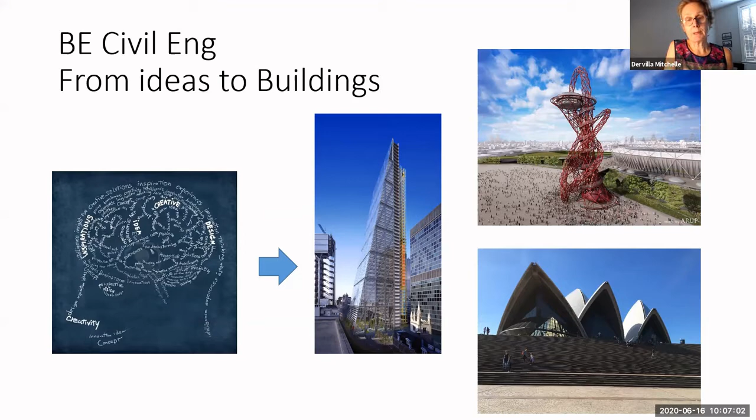Of these three pictures, one is Leadenhall Street in London, I was involved with. One might find oneself involved with buildings or bridges, or in this case, on the right-hand side, a sculpture at the London 2012 Olympics. So turning ideas into buildings is my job.

If I look at my career on a single sheet, I've gone from being a structural engineer to being a multidiscipline engineer. I started with a lot of design and calculations. I found myself managing teams of people, then leading projects, and eventually what I would call design team leader - the DTL - leading large multidiscipline design teams.

I've been responsible for groups of people, and I've had a lot of work in aviation. As Amanda said, I started in Dublin, had a couple of years in Boston which I thoroughly enjoyed, and then returned to London. I've spent quite a lot of time in London ever since - I think it's about 30 years now in London.

But my early work was very simple extensions. Although I started in UCD, my first work was in Trinity - extensions to the Pavilion Building, extensions to the Science Building. Very simple things, but things as a young graduate I could get my hands around.

I was extremely proud when I was given my first package, which was the handrails and crush barriers at the East Stand at Lansdowne Road, now long since demolished. But as a young engineer, I was proud to have that responsibility for people's safety at a new stadium.

And then I spent a year on site at the UCD Library Extension, so those of you who are from UCD will recognize this building. It was a very different time then - here's a picture of young Dervilla on site with no ear protectors, no health and safety equipment. I think the industry has moved along quite a long way, and health and safety is now at the forefront of our minds all day and every day.

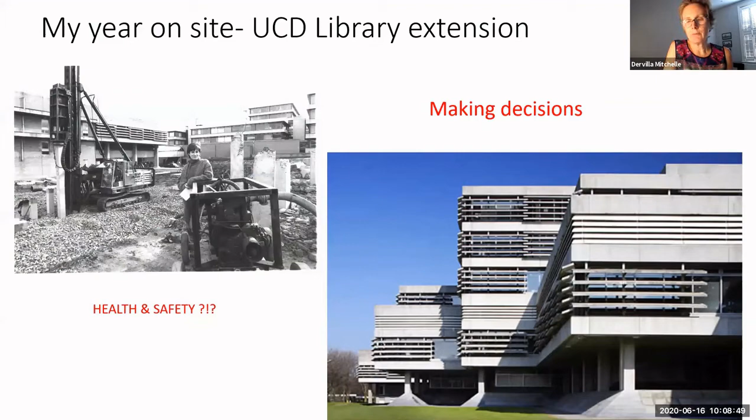But then I was married, and I had the opportunity to join my husband in Boston, where he was studying at Harvard for an MBA. And I joined a company called Weidlinger, and I had the chance to do lots and lots of projects.

I left Ireland at a time of recession, and so I would advocate to you to think about the opportunities that a crisis or a problem brings, particularly now as we're locked down with COVID.

So what did I learn from working with America? I learned to be much more independent. I'd moved from a large organization, Arup, where I was very well supported, to a much smaller organization where you had to be independent. I learned how to move from metric back to feet and inches - so how do you relearn some things?

And I also did the same hotel in 2 different cities, and what you discover is how much more you can become more efficient and you can improve what you do. So America was a hugely learning experience.

But we returned to the UK, and I call this the shopping centre boom - in the late 80s, 90s, all there were were shopping centres and town centres. So what did I take there? I learned to be responsible for a larger team, and that's a bit scary at first, because you're responsible for everybody else, and also you're not as efficient because you're suddenly looking after others. But I think you have to just take the opportunities as they arise, and I learned a lot about retail.

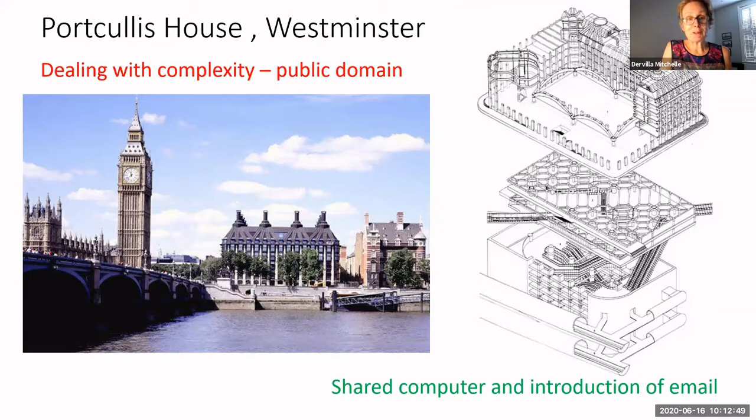Technology was changing. And then this is probably one of the most significant steps in my career, was moving and spending six years based at Heathrow, taking the Terminal 5 project from early concept stages right the way through to delivery and completion of the structure.

I did not stay on for the fit-out stage, but it was six years of fantastic learning. You have to acknowledge that sometimes during your career you have to stick with a project for a period if you're going to really extract all the learning from it.

At that stage it was the first time I really came across what we called at that time a single model environment, one single model of every single bit of the building - structure, services, baggage, everything. An image from it is there on the right. Today that's called a common data environment, but it's taken a long time for it to be more adopted by the industry.

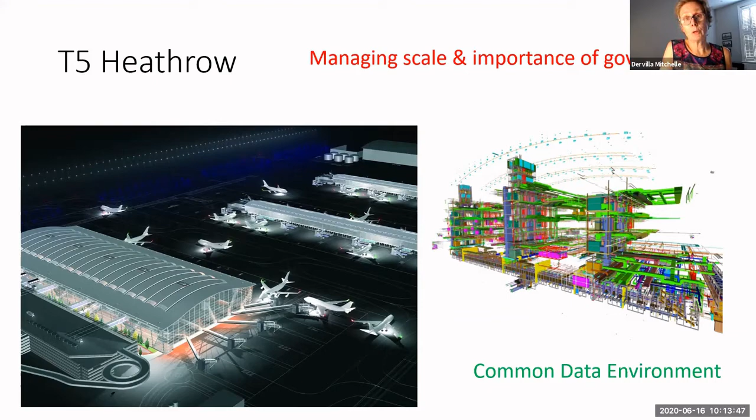When I finished at Terminal 5, you have to go win more work - that's the stage of your career where you've got to win more work. So I was part of the team that won Terminal 2 in Dublin, and I spent the next couple of years traveling from London to Dublin every week to work on this project. It's nice to have a project in my hometown.

After that, another major project - I worked on the housing for the Olympics 2012, but in effect it was the creation of a new city and housing in the east of London. That was very demanding in terms of time and delivering something cost effective, so very different from the airport work, very commercially driven.

Then I decided to accept another challenge - I'd done two airports, and here was one in the Middle East. It is absolutely vast; those facades at the front of the building are something like 70 meters tall. If you look at the slide on the right, I can highlight some tiny little red dots - those are people, showing the scale of the whole structure. So very large, very complex project, a different cultural environment, different norms, a different way of working.

I've probably worked on that for over six years. It's not yet finished, but it's been a massive learning experience and exciting to understand a different part of the world.

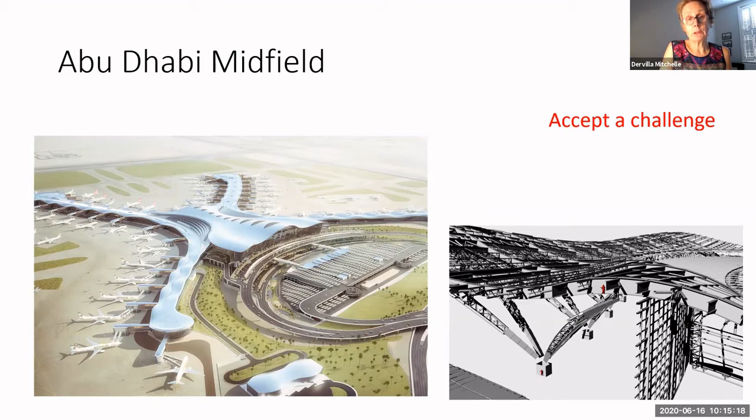After that, I returned to my home base in West London and worked on the expansion for Heathrow. It's now stopped, but it was very interesting to work collaboratively with a range of competing engineering and consulting organizations to conceive and be ready to deliver a new master plan for a major airport. Very different work - front end planning, organization, enabling - as opposed to delivering design. I enjoyed focusing on a different part of a stage of a project.

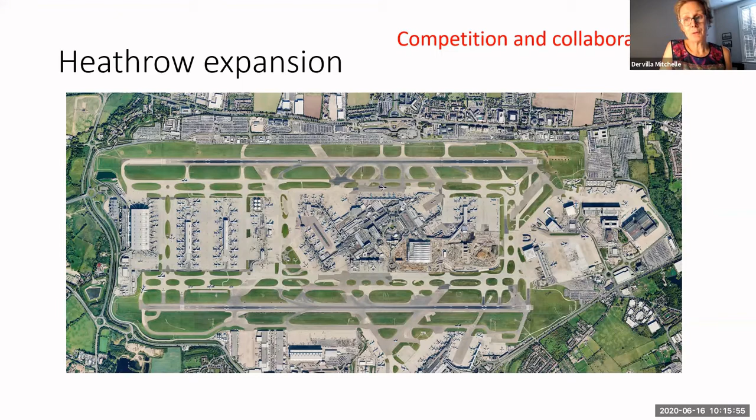I wanted to say that over my career - which thinking about it today makes me realize how long it is - I've moved from a very drawing board, paper-based set of tools, right the way through computers and programmable calculators, to now storing most of our data in the cloud and working collaboratively in the cloud. That's been a big, big change. I think that's one of the exciting things, that it's always evolving and changing. But probably more important for me is that the output has become much more exciting and interesting.

When I started out, top left, it was everything to do with reinforcement drawings - paper, black and white. We moved at the T5 stage into 3D models, lower left. Now on the top right, you see an animation of the design of a stadium, incorporating the landscaping, the structure, the services, and the flow across the top is the model of the air temperature as it flows across the stadium, and how they maintain a cooler temperature within the stadium for the players. On the bottom right is one of the most major projects in London, Crossrail, where we can model the existing services, the new station, and the people moving through those facilities. So it can be viewed by clients and people not engaged in the business much more easily, and we can explain our work much more easily.

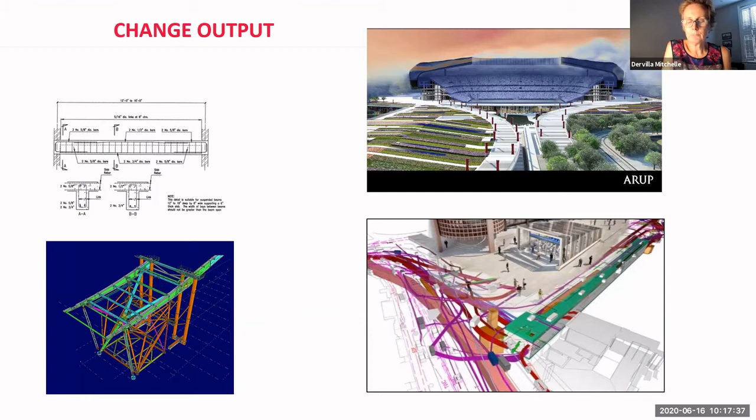But we're going to move forward into a time where we're going to experience our work. I'm just pressing play here.

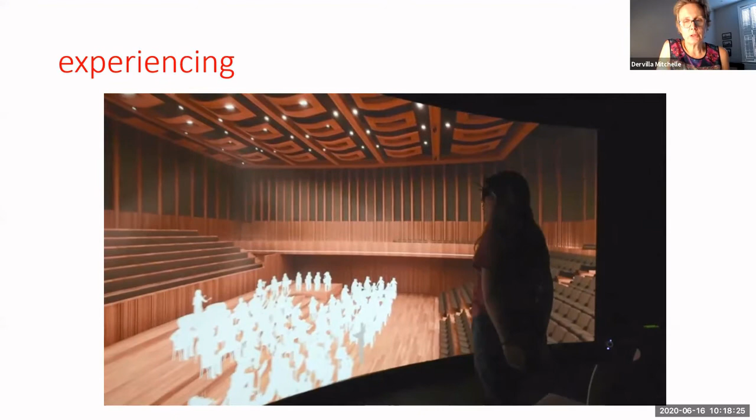This is a little lab, what we call SoundLab, in one of our London offices. Here, before the design has been completed, while we're talking to the client about a new concert hall, we can bring the client into the office, and they can both hear the orchestra that's playing and see what it would be like to be anywhere in that auditorium. So they can sense and feel what it's going to be like, and they can tweak the design in advance because they're able to experience it. I think this is not done on every project at the moment, but it will be done on most projects in the future. I think that's great.

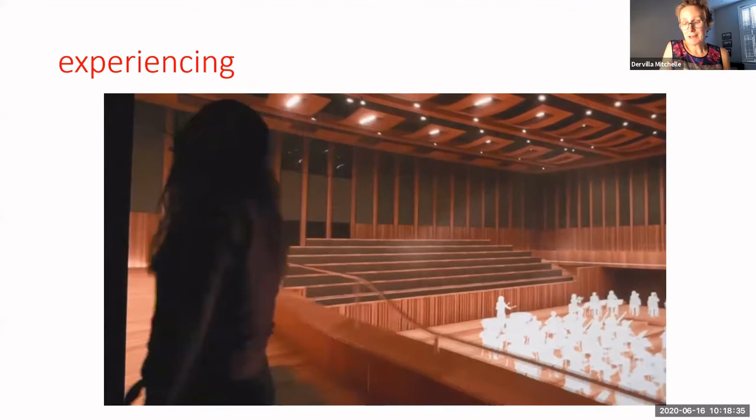I'm going to stop speaking for a minute and have you listen to one of my colleagues, because this is a view of what might happen in the future - how we use robotics and how we create material in a different way.

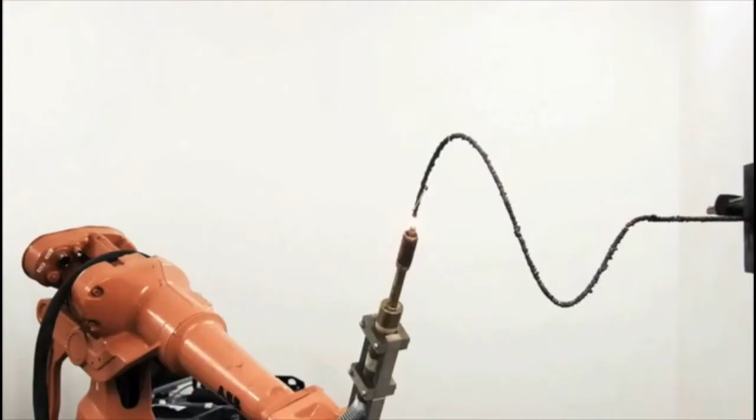So this is a bridge in Amsterdam. This project, the MX3D printed bridge - it started with an artist who specialized in designing chairs using digital fabrication techniques. One day he put a welding device on a robot arm and started printing steel wires in midair, then decided, hey, that could be a bench. When the bench was done and it looked beautiful, and he figured out his technique, he said, well, this could be something else as well. Then he decided, let's make a pilot project out of it, and let's print a bridge. Now, if you make a chair, you get a big guy to sit on it, kick it a couple of times, and if the chair doesn't fail, it works. With a bridge, it's a bit different - you need some engineering, and that's when they called us.

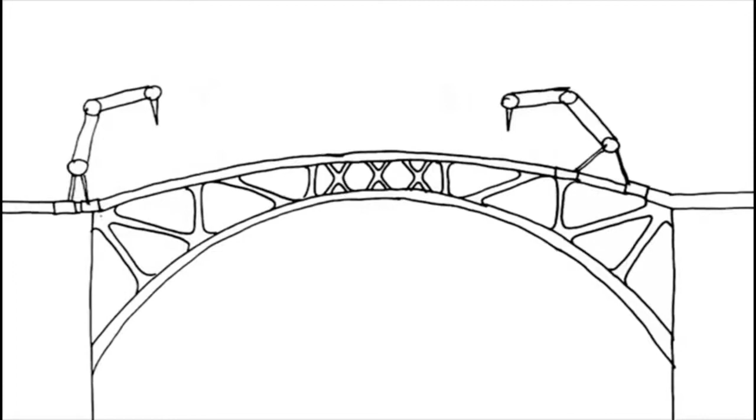We came in with our traditional engineering constraints. It has to be safe. It's going to be put in the red light district of Amsterdam, so women in heels are going to be walking on it, so it has to be dense, and all other kinds of constraints that we brought along. Slowly we came together on this project. It's a new construction technique, and it's also a very difficult product because we don't know the tolerances, we don't know the material specifications.

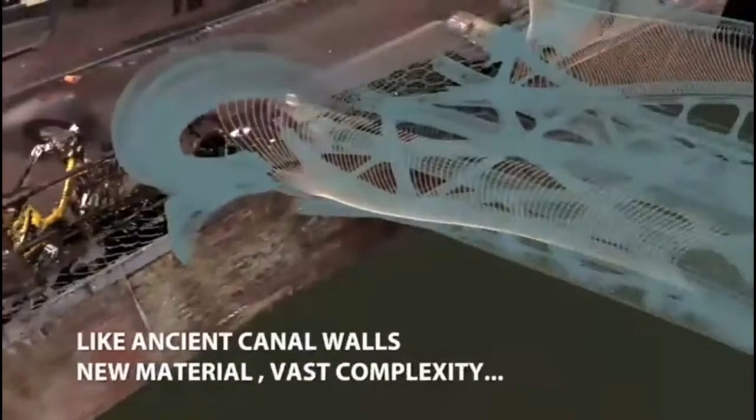We don't know the exact geometry of the end product, so it's very difficult to analyze. What we did was make a conceptual design and said, if you do it approximately like this, it will work. During the printing process, we kept testing and monitoring the product. When the product is done, we test the whole thing and keep monitoring it during the lifespan of the bridge to ensure ourselves and the world that this element is safe.

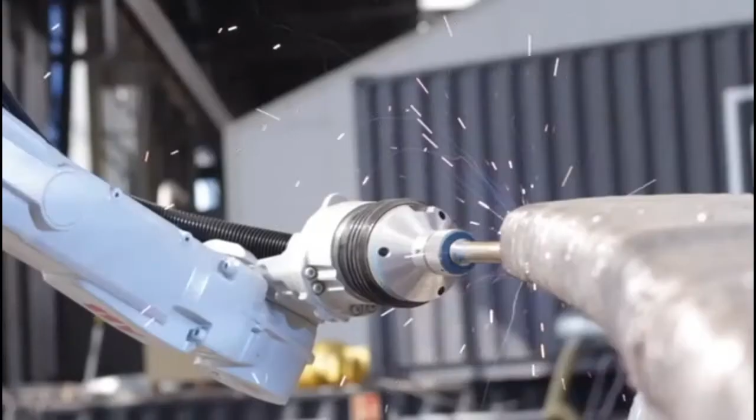For us, that's a new way of working, definitely in Amsterdam. What this project has taught me is that if we look at new construction methodologies or new materials as a product that you can test the end result, then we can speed up innovation in our field. That's what I really learned on this project, and that's probably the most interesting bit for us, because if we can bring new materials or construction techniques to market quicker, we can innovate quicker and get ahead quicker as well.

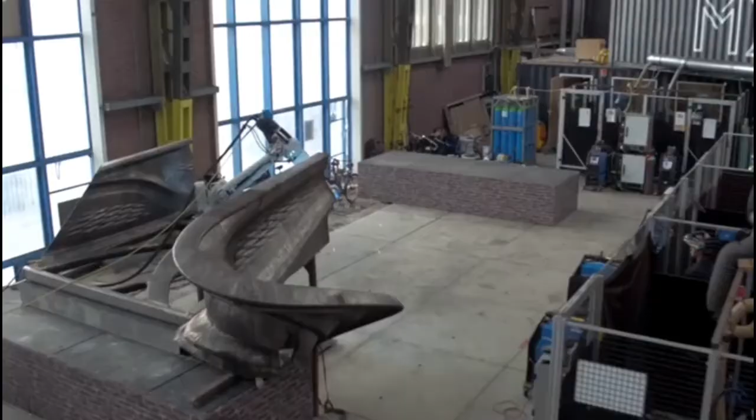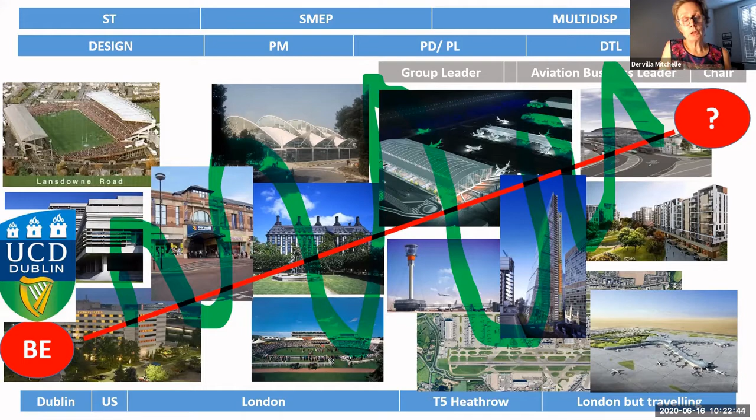But you can learn from all of those times. I did not expect, setting out from Dublin in 1980, to be where I am today, but I am. I'd say it's about being opportunistic—taking the opportunities and learning from them as you go. But you don't just learn from your projects, you learn from everything you do outside. I've learned from my family life and my 3 children, from doing projects in my community, from working with universities, from being a school governor. That has given me a breadth of knowledge which I apply every day to my job.

But before I conclude, I want to say—what did I get from my time at UCD? I think you get a very broad teaching, a broad set of skills, and many I didn't appreciate the value of until I had finished and moved on in my career. You get classes with other disciplines, which I think are really important to develop multidiscipline thinking and understanding, because the future is going to be in integrated, interdisciplinary work. I think you get a degree you can travel with, and that may be important in current times.

And I think the masters, although I personally did not do one, is really important as it enables you to step quickly and surely to chartership. Your career does depend fundamentally on you being a chartered engineer. I think the UCD Masters is great in that it has work experience within the 2-year program, and therefore it connects you with businesses and enables you to find a job more readily afterwards, with that employer or another.

So on that note, I should probably say thank you all for listening to me. I hope you will have successful and rewarding careers, and look at a job like this and be as proud as I am of the work I've done. But it's not just me—engineering is a real team game, so it's about collaboration and working with groups of people, which is the fun bit I really enjoy. So I'm going to hand back now to the team.